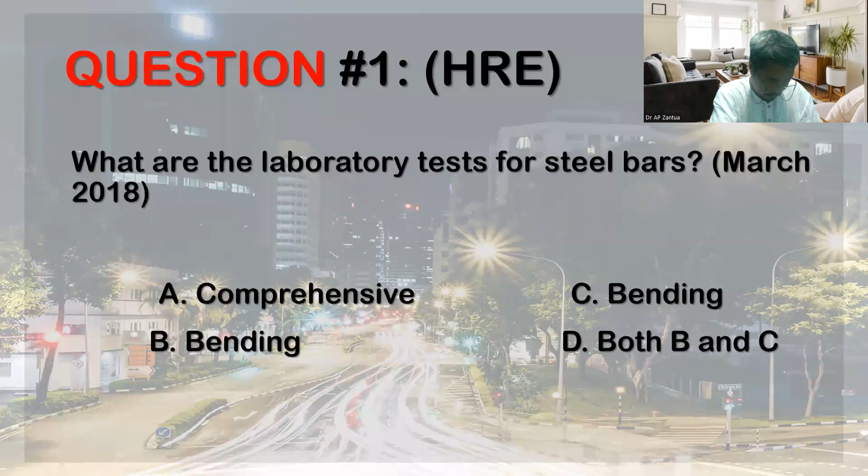I will check if ever I can get the original copy. I don't know. I think compressive, letter A; letter B, bending; letter C, maybe tensile or tension test; and letter D, both B and C. Let me check - okay, so it's correct. Letter A is compressive. So just like what I taught, compressive, and letter C, tension or tensile, and therefore our answer should be letter D. Okay, D.

So number 2, we have question: Paint is composed of blank pigment and blank vehicles. What do you mean by this? So we have percentages on the recipe, on the ratio of pigment to vehicles.

So vehicles, as we are talking of highway, okay, what do you mean by vehicle when you are talking of highway? But actually, we are talking of paint. So when we are talking of paint, these are the usual components of paint: we have 20% pigments, 42% binder, 4% additives, 14% filler, 20% carrier.

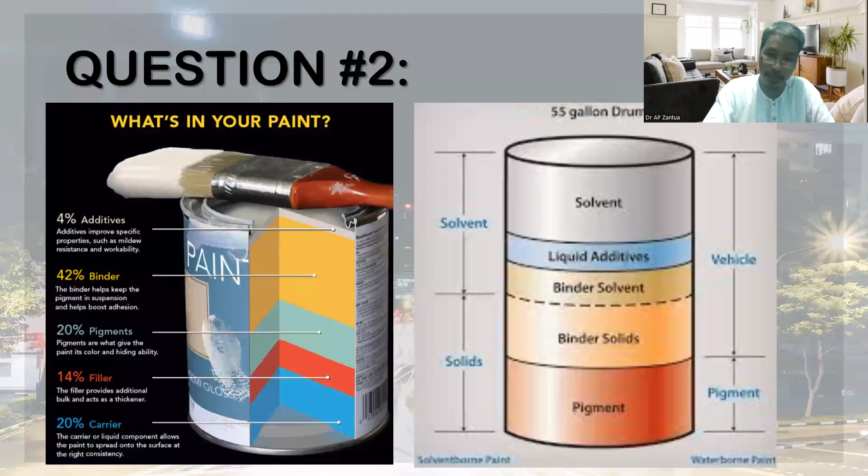So, therefore, A and D are possible. Okay? And actually, the answer is A. I think if you answer letter D, I think they will still accept it. But the answer is A.

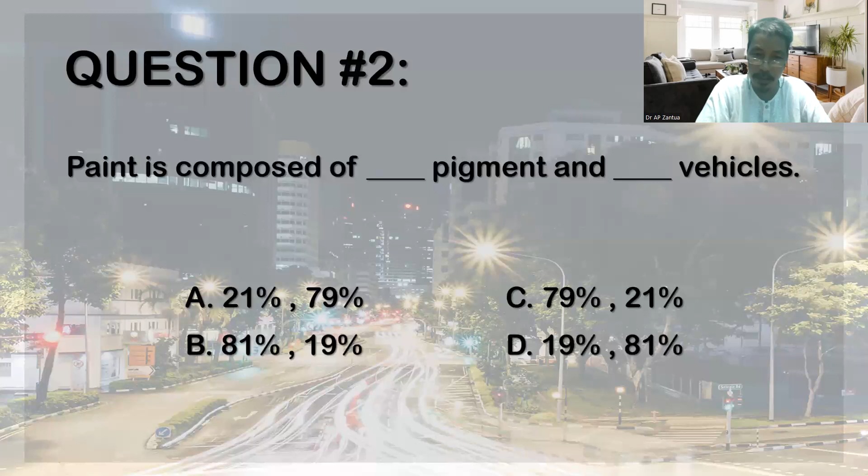Oxygen versus nitrogen composition. Similarly, we have pigment versus vehicle, 21 and 79.

Question number 3: Non-liquid admixture is packed in how many kilograms per container? We have to memorize this, or familiarize ourselves with it. You can actually ask a supplier about this. There are two types of admixture: liquid admixture and non-liquid admixture. This one is non-liquid, so it is in powder or particle form. So how many kilograms per container? The answer here is actually 25 per container.

What do you mean by admixture? Admixture is a chemical mixture which is added to the concrete mixture in order to change the resulting property of concrete, for the better. We want to change the property for the better. Some admixture will make the concrete increase its adhesiveness to steel - we want that to be a positive characteristic. Some admixture will minimize the uneven drying or curing of the surface. There are several types to choose from, but generally it is used to change the characteristic of the concrete in an advantageous, positive way.

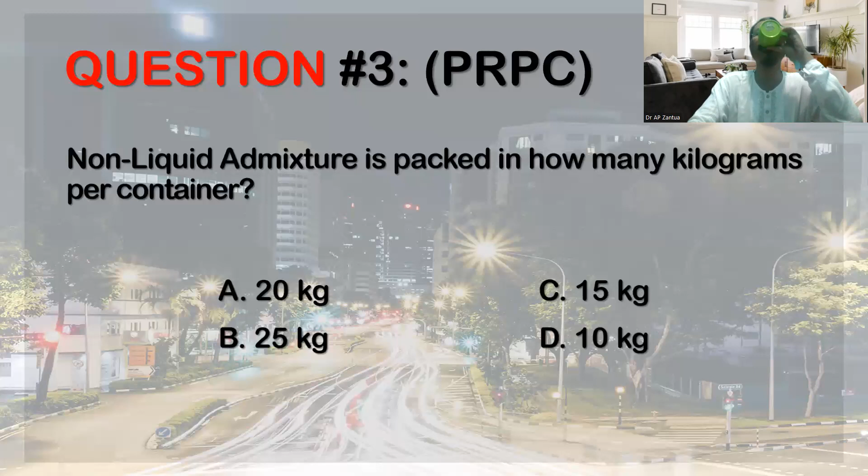So if you can, convert kilograms to liters. But use the formula that we are using in geotechnical.

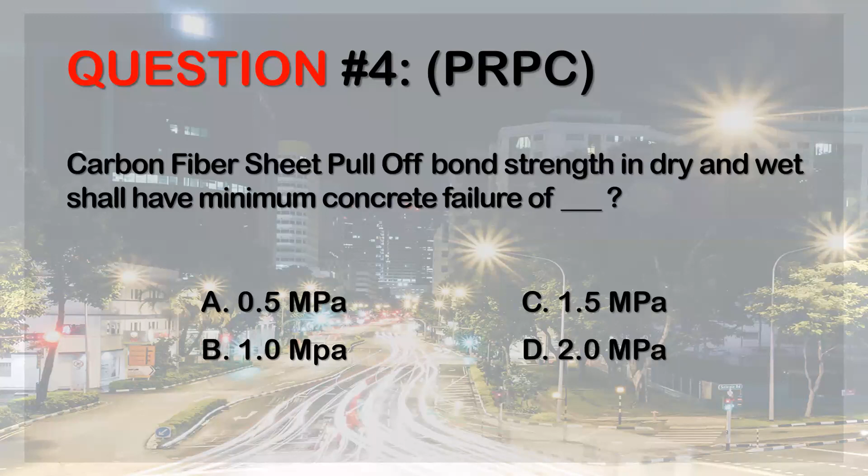Question number 4: Carbon fiber sheet, pull off bond strength in dry and wet shall have minimum concrete failure of? So carbon fiber is a strengthening material. Fiber is giving us the required tension in order to bond the particles, the component, which is usually concrete, because concrete will crush, get crushed into small pieces. So therefore, sometimes in order to add strength to the element, we will usually see carbon fiber added into the component. In dry and wet, shall have minimum concrete failure of how much? The choices are A 0.5, B 1.0, C 1.5. The answer is 1.5.

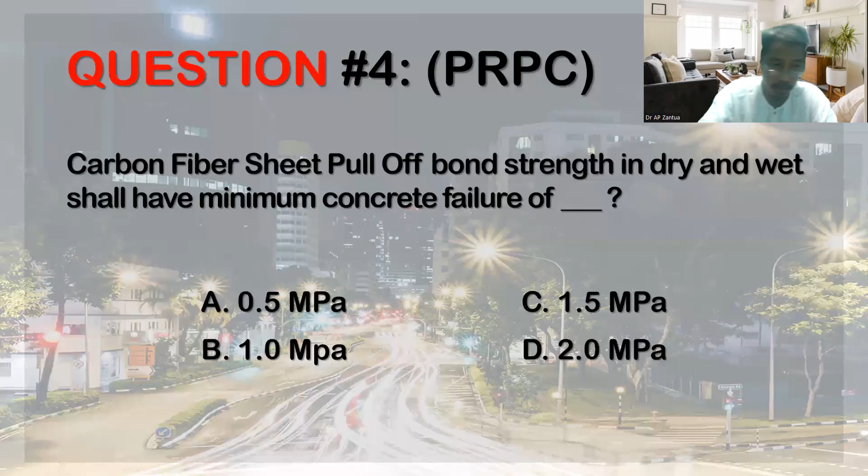Application of coal tar asphalt sealer. So asphalt is a sealing agent or sealing material in order to seal cracks in the concrete pavement. So those cracks, we will seal up using asphalt. It is very normal, I've seen it many times. Maybe you can also experience seeing them many times before.

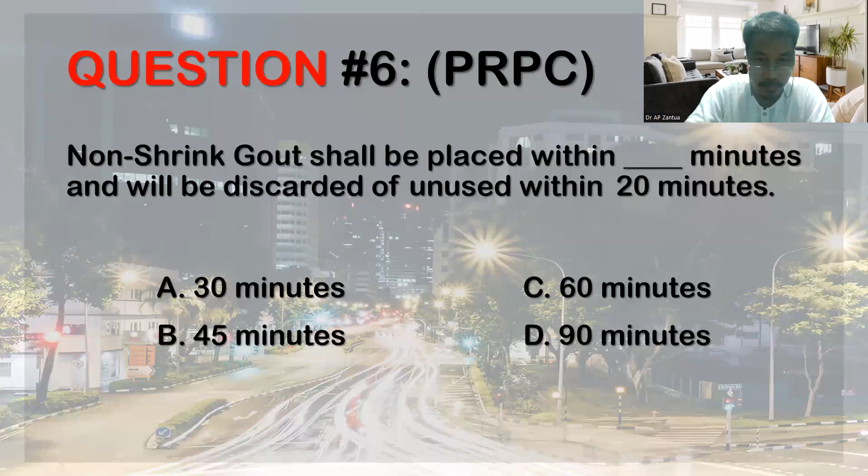So when we talk of stone, it is a little bit bigger. I think more than 2 inches and bigger, we can call it stone. We will talk about it more in the PRPC course, where we have tabulated different sizes and so on.

And also, you already learned it in geotechnical. You already completed geotechnical, there is a definition of what is a stone, what is a gravel. There are specific ranges of sizes.